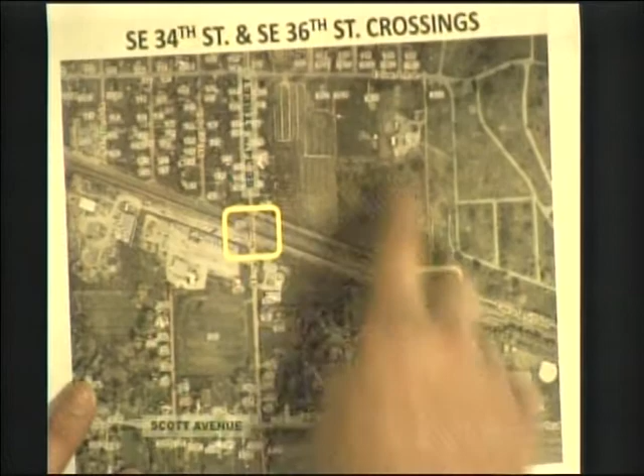Just to get everybody familiar with the locations, we'll have a lot more maps presented to you. This is the Hull Avenue crossing at Delaware Avenue, Hull Avenue to the west, Dixon Street further west, Southeast 34th and 36th Street, Scott Avenue to the south, Dean Avenue a little to the north, not showing up on this map. The other area I don't anticipate we'll spend as much time on is Scott Avenue over by Southeast 22nd Street.

In 2012, Union Pacific came forward with the idea of these 4 crossings being closed. I won't go into detail, I'll let them explain the purposes behind that. But given the magnitude of something along those lines, we encouraged them to go through a process of having some pre-neighborhood meetings.

Normally we have people submit their application to us already for a vacation or a rezoning, and then we direct them between that submittal and the meeting to have their neighborhood meeting. But given the complexity of this, we suggested they take some time before they even submit an application to hold some neighborhood meetings that we would help them facilitate.

We had 2 meetings in July in the Southeast 34th area—one for the Southeast 34th, 36th area, and a second one in the Hull Avenue area. We had some follow-up, took the input from those meetings, and that'll be discussed further so I won't repeat it. Then we went back, evaluated things, and had a follow-up meeting at the Botanical Center in November. We also had a small group meeting with some business owners in the Hull Avenue area to discuss specifically their concerns with movement.

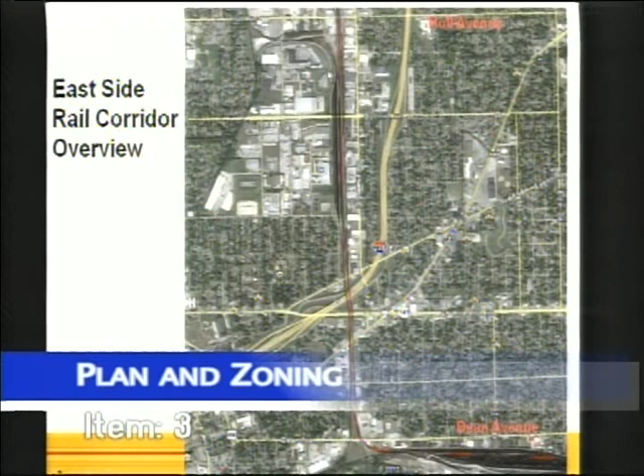To start off with some background, this is the East Side Rail Corridor. This is the north-south corridor for Union Pacific here. Hull Avenue, Dean Avenue, ADM is right up here. As you come down here, we make a sharp 90-degree turn into our east-west yard. This is our short line yard. We'll be talking a lot about that.

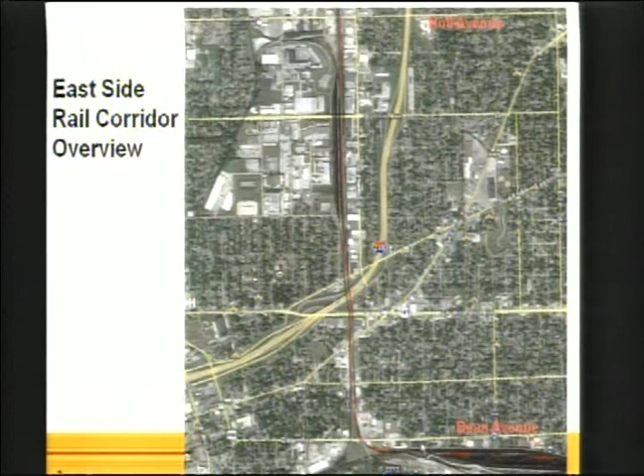This track here, that's not highlighted, is the Iowa Interstate track. That is their route into Des Moines and on into Omaha. Union Pacific and Iowa Interstate share this route. In this part of the yard, this part of that track, the track is very much at capacity, meaning it's full of freight traffic. We have about 100 customers, local-based, who ship goods into or out of Des Moines on Union Pacific.

About 12 trains a day arrive in Short Line Yard. We have an additional 5 to 10 that pass through Des Moines. That's roughly the equivalent of about 6,000 semi-truckloads of goods that are not traveling on Des Moines roadways. We have 170 employees in Polk County with an annual payroll of about $12 million, and we've invested about $15 million in Des Moines since 2005.

There are 4 primary reasons for the traffic delays on the east side due to rail traffic. That sharp curve I showed you limits the speed trains can travel, to a speed limit of 10 miles an hour. There are local industries on the line that have to be served, requiring stop and go service. Those 2 factors really cannot be changed in any way.

Union Pacific, as part of this plan, will invest $750,000 to install power switches that would be controlled from onboard the locomotive. The other factor is we have limited space between road crossings to allow us to put a train both in the yard and outside the yard while waiting for space so a train can be dispatched into the yard. There is no place for us to put a standard length train where we don't sit on a crossing.

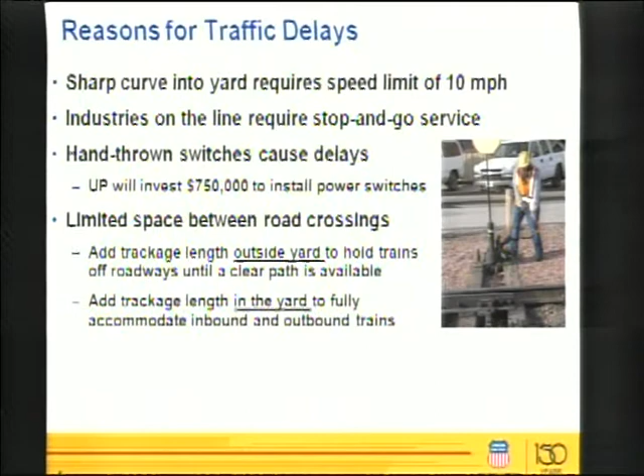There are two things we need in terms of adding capacity: space within the yard and space outside the yard where we can put a train without sitting across a city street. Within the yard, the only place we can gain any capacity is on the east end at Southeast 34th and Southeast 36th. There's no comparable option on the west end because of the curve I showed you and the layout of the receiving tracks for the yard. Without those closures, we don't have space in the yard to bring in a train efficiently. Even if we put those power switches in, we don't have any place to move the train into the yard because we don't have enough space from one end to the other to park a train.

So the proposal, which Jason showed you a little bit, would be to close Southeast 34th and Southeast 36th, and install a new crossing. There actually used to be a crossing here, but we'd reinstall it at what would be Southeast 38th Street. And because of the flooding issues we heard about through the neighborhood meetings, Union Pacific would make available to the city a roadway along our right-of-way for use during flooding emergencies, when they could not have access to Scott Avenue. It would be built according to city standards, which we're working out with city staff.

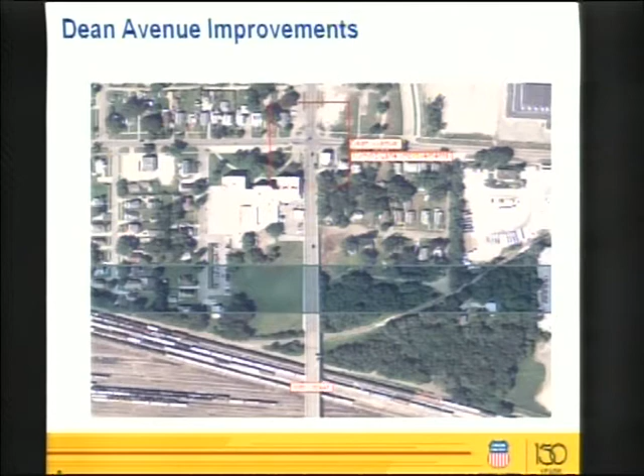I also talked about needing space outside of our yard. We don't have any place where we can hold a train while it's waiting to be dispatched into the yard without blocking a crossing. To the east side, that's Iowa Interstate, and UP doesn't receive trains from that direction. On the south side, we have sufficient space — we can sit south of Maury Avenue or Maury Street and hold a train there until we have space, then move slowly into the yard because we're making a sharp turn. Most of those northbound trains don't actually go into the yard. It's the trains coming in from the north where we have the biggest problem — we don't have enough space to put a train anywhere there without blocking a crossing.

I also mentioned Scott Street. Essentially, until that Scott Street crossing is officially vacated, we're obligated by federal law to continue maintaining the crossing even though it's no longer accessible to traffic. So we're asking for that vacation.

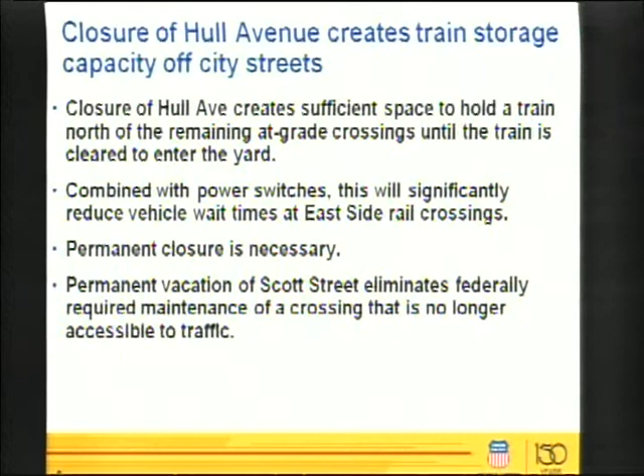So you can see the Hull Avenue improvements — a lot going on here, adding some turning lanes, expanding Dixon, and making intersection improvements so that we can improve the flow of traffic along that route.

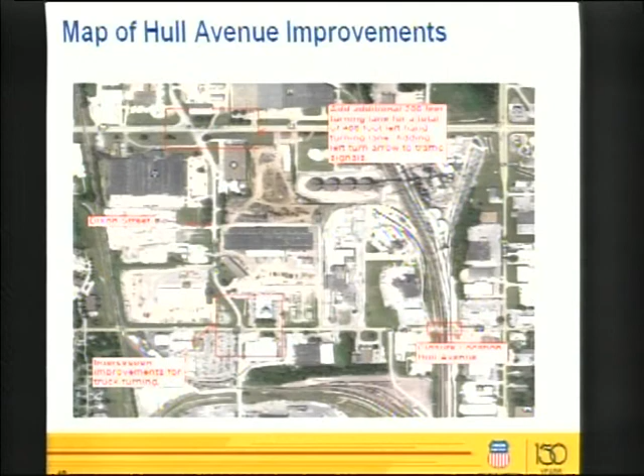We also will do some real-time emergency notification for first responders so they know if there's a train blocking south on Easton or any of those other roads.

The city did some traffic counts here, and as mentioned before, about 3,400 road vehicles on a daily basis would need to find an alternate route, and somewhat over 19,000 on a daily basis would benefit in terms of having that east side traffic move more quickly because of the improvements we're talking about making to the roadways so trains can move more efficiently.

So these closures, this proposal we put forward is Union Pacific's response to the city's request to reduce traffic delays on the east side. Clearly it's also going to improve our operations. It's not good business for us when trains aren't moving, but if we don't have sufficient rail capacity, we're forced to cause delays on public roadways.

Because this proposal will bring improvement for both UP and for East Side residents, we're prepared to invest more than $2 million in the project. It also allows us to meet the needs of our current customers. We're right now being creative in how we meet those needs.

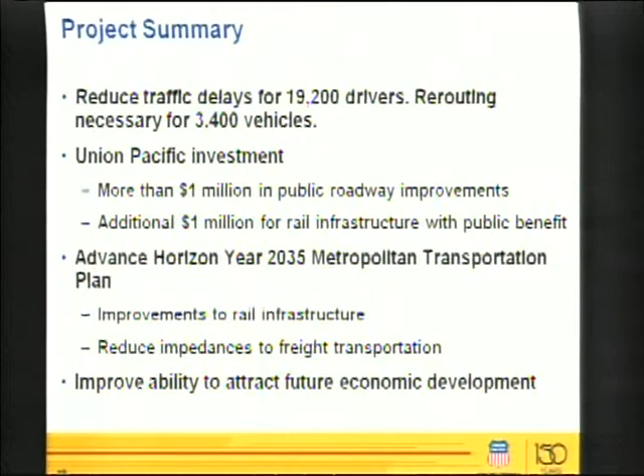But unfortunately, those operating limitations are causing frustrations for East Side residents as they get stuck behind trains, and for our employees as well. As Des Moines looks to compete for future economic development, it's going to need good rail service. You have a letter from the Department of Transportation, and a letter from the Des Moines Area Metropolitan Planning Organization explaining what Des Moines' needs are for rail service. They've done an extensive study about what kind of rail service is needed. This is the kind of improvement that will help them meet that plan.

The bottom line as we see it: without these improvements, we cannot do what the city's asked us to do, which is to improve the flow of traffic on the east side. And we cannot meet the continued needs of our current customers, and certainly cannot meet any new capacity needs that might come into the city.

It's been several years in the making for this proposal. We worked closely with city staff, and we really appreciate their help. We appreciate all the effort they went to in order to get us the neighborhood input we needed. We've made a lot of changes to the proposal as a result of those neighborhood meetings. We're requesting that the commission accept the staff recommendation for the vacation of these roadways. With that, I'm happy to take any questions.

Any questions? Thank you, I think I have a question. Go ahead, Will. Could you go back to one of your maps, please? The one you know... Well, yeah, this one will do.

I'm looking at the figure 19,000 on East Euclid. Those are traffic automobile counts, is that correct? That's my understanding — this is a city chart. Well, it is though, isn't it? Is that not true, a traffic count? That's it, Will. But the red lines actually are rail lines.

Correct, and those red lines are being used by the railroad, and then there are other lines that are not red but are also being used by the railroad. You talked about the interstate line, I think. My question is this: I notice a number of the rail lines north of Euclid Avenue. I have a concern about capacity and the need in the future for the railroad to actually block East Euclid Avenue as well. I believe Euclid is separated. Yeah, there's an underpass at Euclid. There's also, though, a line to the west of that as well.

Did we cross? No, that's ADM. This dead end is a dead end, correct? Yeah.

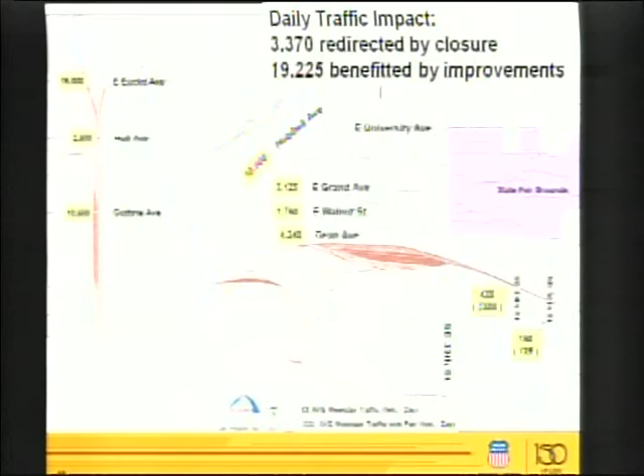Right here, this line — Union Pacific Railroad, Omaha — right there, that line's the Ankeny industrial lead that goes out towards Ankeny, and it is presently being abandoned, or is abandoned, from north of 54th Avenue. Is it possible that could be used in the future and reopened? It all depends on how the rail banking or what happens to the right-of-way at that location in the city of Ankeny.

We also have the Swanwood industrial lead that goes north up there as well, and that is available for industrial development up there at this time also.

I have another question. The staff report mentioned that the fire department has determined that there might be a need to use Dixon Avenue at a time when it's blocked, and as a result, there'd be a flashing light that would warn emergency vehicles to use a different route. Is that concern warranted? I would defer to the fire department on that. We will install that as part of the plan, but I would defer to the fire department as far as their concerns about that.

Tom Patava, Fire Marshal with the Des Moines Fire Department. When we were asked to take a look at this plan, the one concern that we had was, since we would not be able to use Delaware if we were coming from station number 3 to get to the northeast, say at Luther Park Apartments, we wanted to be able to use Dixon. But knowing that there was a train crossing at Dixon, we didn't want to turn north on Dixon and get to that crossing and find out that there was a train. So we asked for some type of a signal, some indicator at Guthrie, so that we knew that there was a train across Dixon. We would continue east on Guthrie to East 14th and then come in from that direction. They've indicated that they can do that for us, and with that, we do not have any concerns about responding to that area with that closure at all.

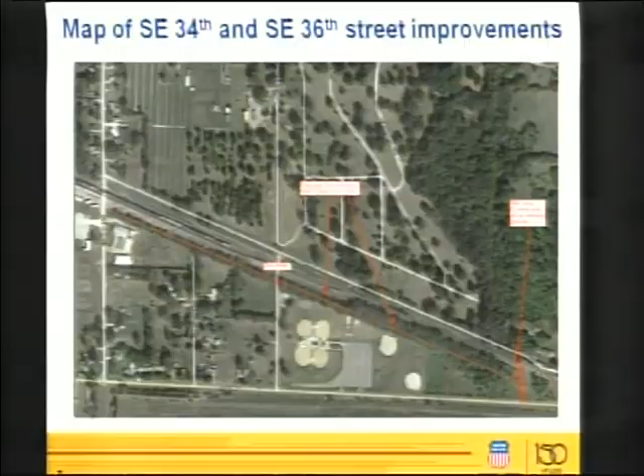Yeah, they would. If this project moves forward and the city council ultimately says yes, this is something we want to do, we will be developing an agreement with the railroad, and that legal agreement would include the list of these improvements that would be made. They would actually pay for them, and the city would be constructing them. So long story short, yes, they would pay for its construction, but Public Works would, after it had been used, need to go through it, make sure it had ample rock on it still and graded. It wouldn't be an ongoing thing because it's closed, just as needed.

Does that answer your question?

Well, I don't agree that I'm jumping around, because that was conflicting information that I heard. My concern is we have other neighborhoods that don't have paved streets and we're not maintaining them. And if we say we're going to maintain some more, I'm concerned that we're stretching our limits with our budget, which has such big constraints on it. That's just my concern.

Yeah, I apologize, I wasn't trying to suggest that the question was out of line. I just didn't know if the chair would prefer I go through the staff recommendation that includes all these improvements. Yeah, I think that's what we're looking for. Okay.

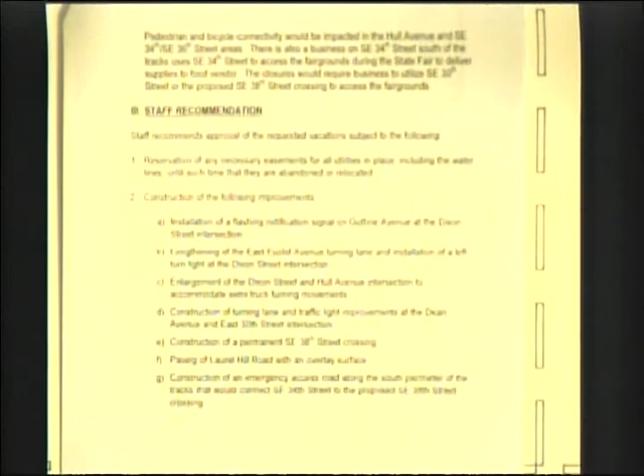We, as staff, have looked through this. There are things that need to be mitigated. We've developed this list that's a part of our recommendation. We only are comfortable recommending approval if these improvements are made. So I'll read through them and show you where they are impacted on this map. One is the flashing notification that was already discussed, so that would need to be part of the construction.

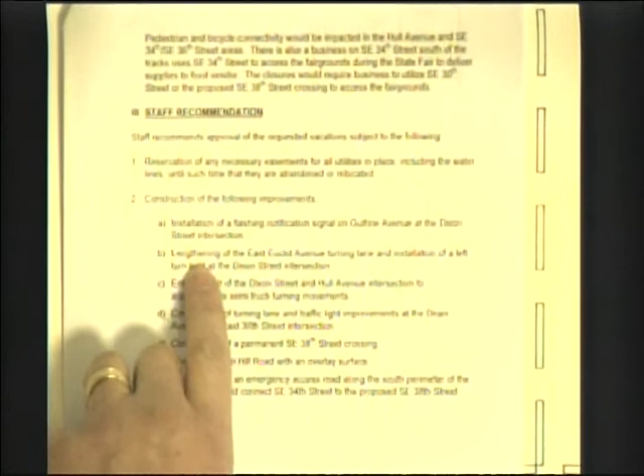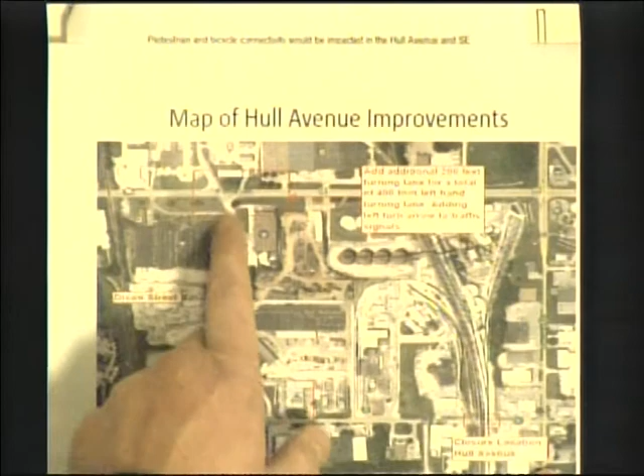B is lengthening the East Euclid Avenue turning lane and installing a left turn arrow at Dixon and Euclid. I don't know how well this shows up, but right now this is a 200-foot long turning lane, so it would be increased to 400 feet, and an actual arrow would be added. Right now there's no turn arrow; it will help facilitate movement. So that's one of the improvements.

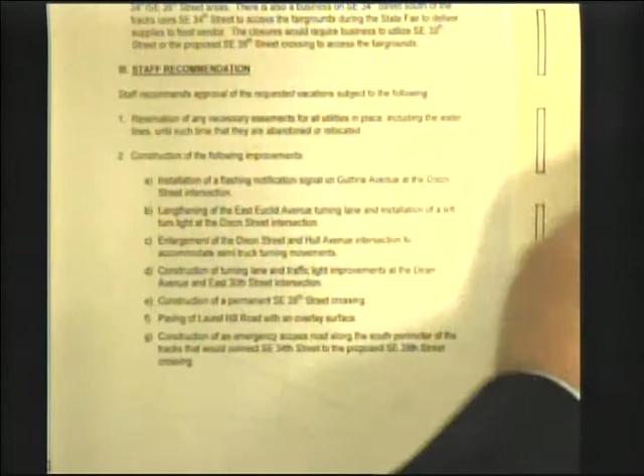D is construction of a turning lane and traffic light improvements at Dean and 30th. That's been mentioned, so I'll show you a graphic that shows how that would work. Here's Dean Avenue and East 30th. You can see the addition of two lanes to the north and the turning lanes on the four sides.

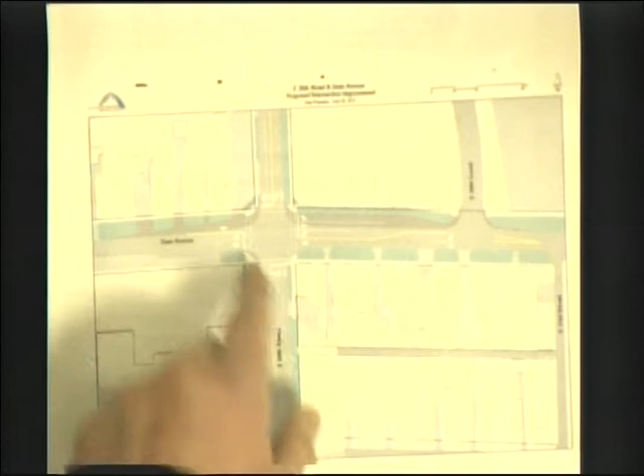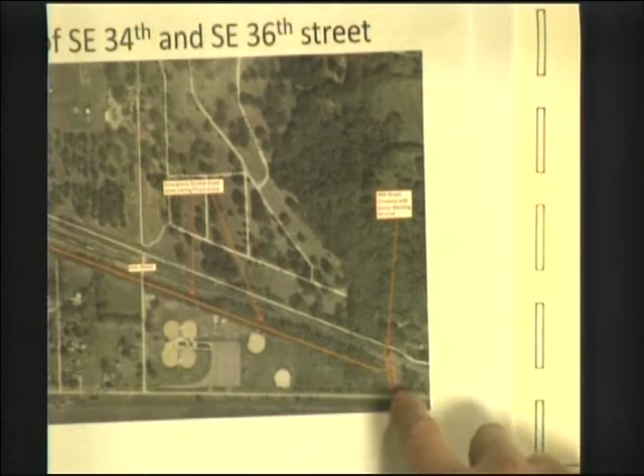E is the construction of a permanent 38th Street crossing, which we've mentioned. It would connect Laurel Hill Road and Scott Avenue and be open at all times. And then G is the emergency access road connection.

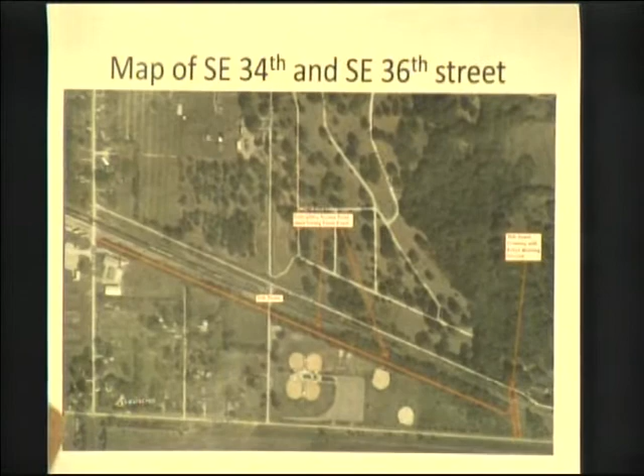As I indicated, if this project were to move forward, the City Council will receive whatever your recommendation ends up being, and they'll have a decision before them to make. That will be either to decide we're not proceeding, that they're not interested in the project, or to direct staff to continue working with the applicant to iron out all the contractual requirements that would ensure all this would take place.

Jason, you also, I think, left off F, which is paving Laurel Hill Road with an overlay surface. Okay, yes, I apologize if I didn't mention it. No, that's fine, I just wanted to note it.

We were continuing to look at comments as they come in. I anticipate that we'll have a lot of comments tonight and perhaps new concerns that may be brought forward, and we're willing to continue to look at those as well. I'd be happy to answer any questions you might have.

Have any questions? Mike? Jason, can you go back to the graphic? I think it was Dixon, where you showed a line with impact on the surrounding properties at the intersection. The turning radius? Yeah.

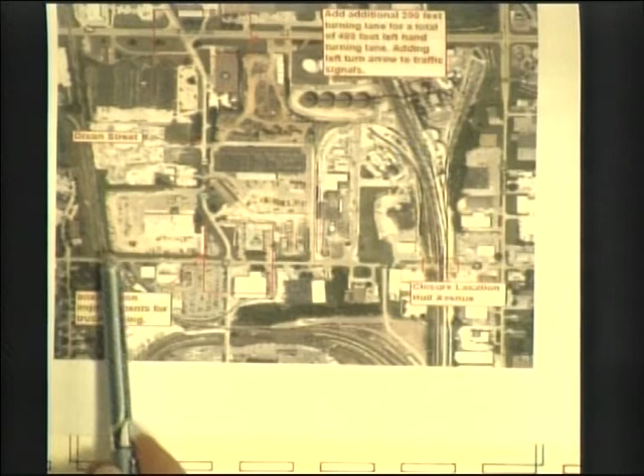So, Jason, could you point out on that area where the crossings are that might be affected? I believe the crossing on Dixon that has been raised as a concern by the fire department is down here. I think perhaps the gentleman who spoke was also talking about the crossing on, I don't know if he mentioned Hull—there's a crossing here on Hull. I don't know if he was talking about how there are multiple points within the neighborhood, but this is the one identified by the fire department as a concern.

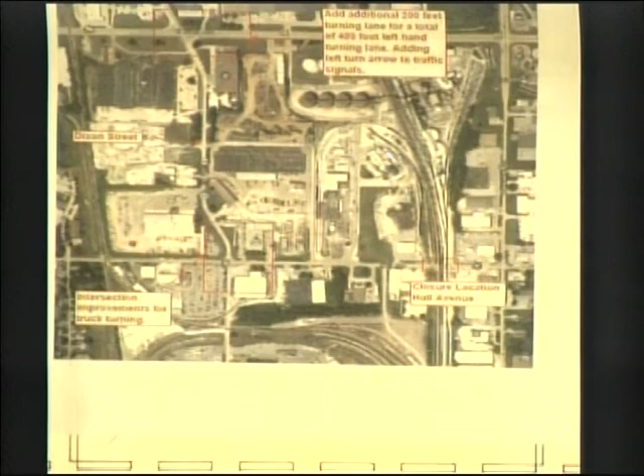Okay, could you put it in focus, Jason? It's kind of fuzzy. Let me see if I have a better photo. Part of the problem is the picture quality, not just our document camera. And Jason, actually, I haven't.

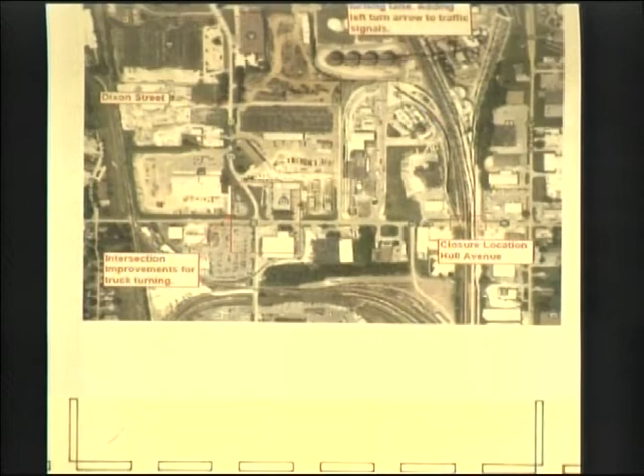So here's Dixon, Hull, the crossing. Okay.

There was also a question from one of the commissioners about right-of-way acquisition, and that hasn't been finally determined at this point. It would be subject to further analysis and negotiation with individual property owners.

I also had a note about a concern regarding the soils around the railroad right-of-way between East 30th and East 38th and the roadway sub-base. I assume that would be looked at as part of the roadway construction design. It would have to meet our city standards for a roadway, including the sub-base, and if it was insufficient, they'd have to amend that soil where the road would be to provide adequate sub-base.

Is that accurate? Yeah. I just want to emphasize that through this process, we've been working with the design section of our engineering department, and they've been providing feedback about feasibility and placement of that emergency road or construction of the 38th Street crossing. So we've gone to a level of detail beyond just drawing a line on the map and assuming it can be done. We've made sure we worked with engineering to evaluate those proposals.

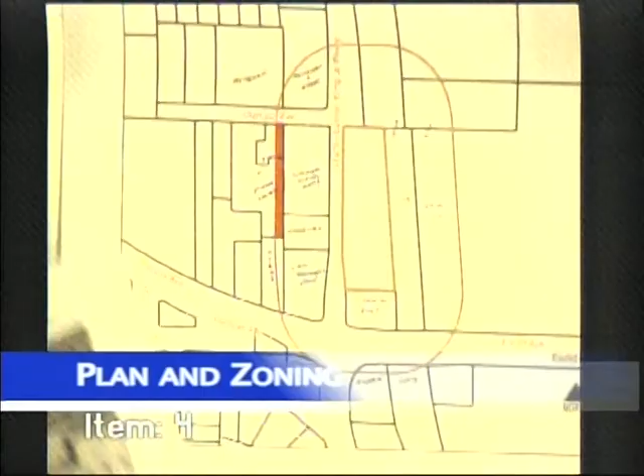All right, we're going to go ahead with item number 4, a request from Kent Lehr to rezone property located at 2425 Euclid Avenue. Jason, are you presenting on this one? Yes, Chair, members of the commission. Jason Van Essen with the city's planning staff. We have one card being passed around, and a letter from the Lower Beaver Neighborhood Association. There's the response map. The property is near the Douglas MLK intersection.

Okay, so you have the letter. Excellent. The site was originally constructed as a lumberyard. The applicant is seeking rezoning to M1 to allow it to be used for a construction business. I'll show you a couple photographs and get into the staff report. So this is the intersection. This is the property in front of it. You can start to see the property back to the north, the southern perimeter of the property, and then looking back down MLK towards the south. There's a mix of buildings, as you can see from the aerial. There's office space, there's indoor storage, and outdoor storage that would be part of the proposal.

When we look at these rezonings, the first thing we do when somebody comes in is compare it to the 2020 community character plan and the designations on the future land use map, and also the goals within the plan and the text component. In doing so, and looking at this proposal, we are recommending denial. We don't feel that it's the appropriate location to amend the land use plan to general industrial, or for light industrial zoning, M1. There is residential development in the area, as you can see on the map. This area is kind of what you typically think of for highway-oriented commercial development, C2. I know we've talked about this type of situation in the past few months with some different proposals. This might be something where a use variance, going down that process after a rezoning, could be a potential option. So anyway, in a nutshell, that's the staff recommendation.

Happy to answer any questions from applicants. Any questions? Okay. Could the applicant please come forward and give us your name and address?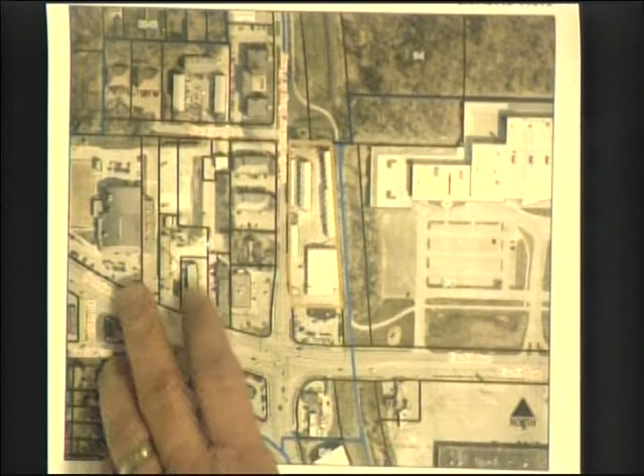To give you an idea of the area, over here is the old Target — huge investment. Polk County just did an awesome building there, River Place. Up here we've got Plaza Lanes and Trophies. Randy Thompson owns a lot of land in the area and a lot of businesses. In fact, we're undergoing the revitalization process in our neighborhood, and he is a key component as a business owner. He was very concerned about M1. I've reassured him about who the individual is.

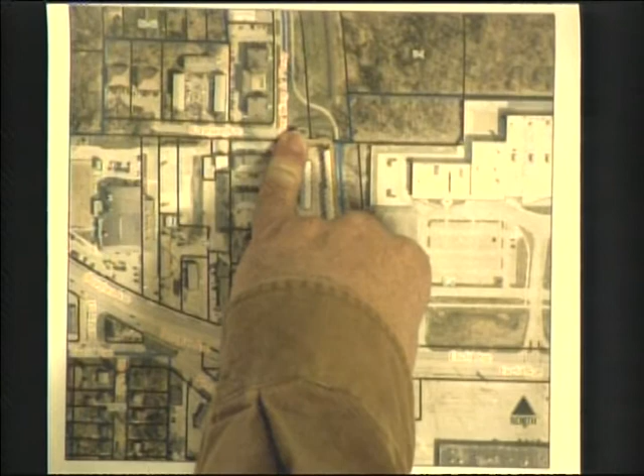This is a trestle trail that runs up there. Alongside it is the MLK greenbelt that the neighborhood developed without city funding or anything. It's the largest greenbelt in the city done that way, and it's almost a half-mile long. And where it ends is at the Thai Village, another awesome development in the area.

The Lower Beaver neighborhood, a couple of years ago, was cited as the second most stable neighborhood in the city.

So why would we consider an M1 use in the area? Well, we like the applicant and we think we can control it. But what it has to do is go through this body and be denied, and it has to go to the city council being denied. It's kind of weird for him to get a variance to do the things he wants. He has to go this route, and he has to go against what's good for the neighborhood in the long run.

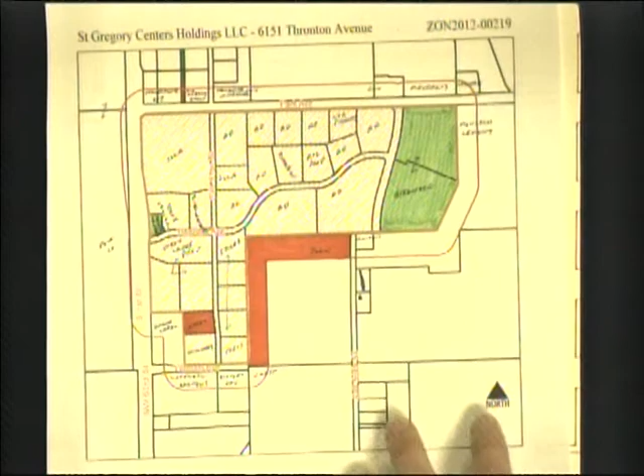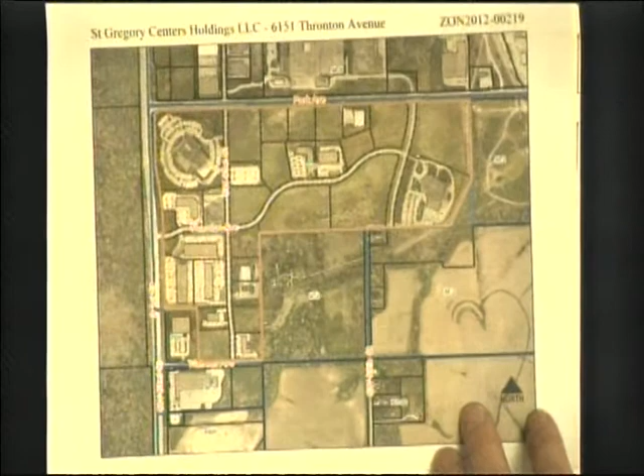Anyway, it's the boundary of the PUD, and then the notice area extends beyond the boundary of the PUD. This is the subject property, 63rd Park Avenue, or the subject, the PUD. Here's a photograph of the specific building within the development.

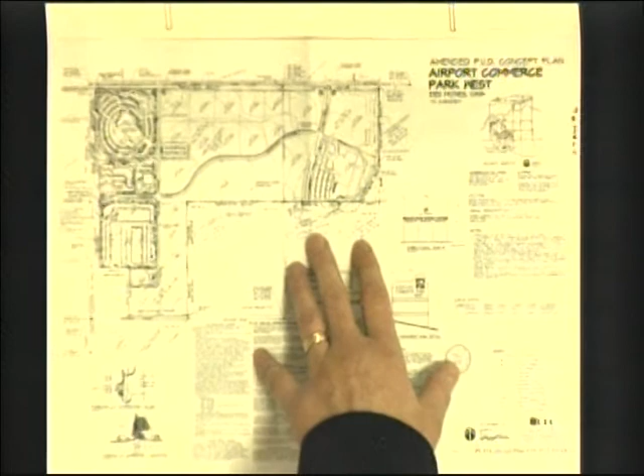And then this is the sheet that we have for the concept plan, the update. This is an existing PUD. This is a specific use. This use is not specifically mentioned within the PUD as it stands now. Therefore, it needs to go through this amendment process, which is really the same process as rezoning, but really the only change that's proposed here is specific to the language of allowed uses.

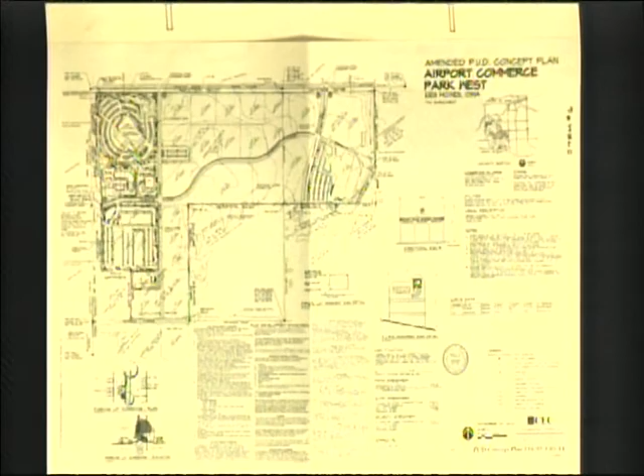We've reviewed the proposal. We think that it's in line with the intent of the PUD and also with the establishment of the designation and land use plan. We are recommending approval. We do have a list of conditions, but I'm not going to read through them because they're really housekeeping type additions with regard to notes on the PUD, such as identifying buildings that have been built since the original concept plan was approved.

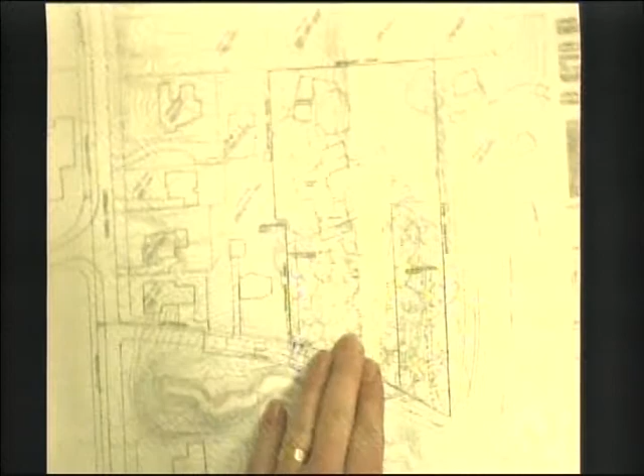So here's the proposed plat. The driveway access back to the existing property. There would be a shared easement to provide access to this property so they wouldn't have to try to negotiate the grades that are a little more challenging here.

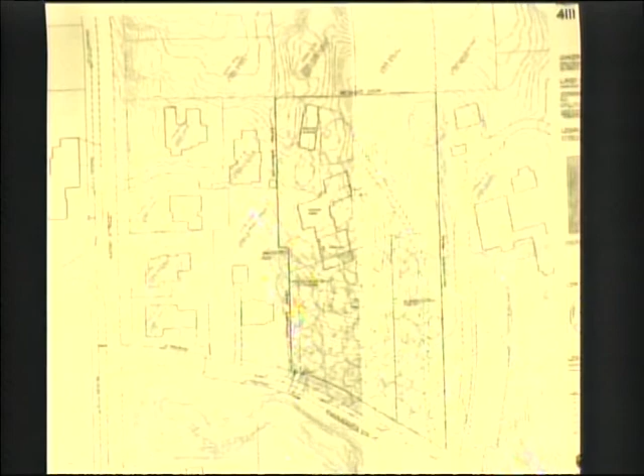The one thing to point out here is that these lots meet zoning and stuff. The reason this is before you is essentially to extend a water main to this lot, which is within the vicinity, but it's not. It will have to happen. It does require a preliminary plat that comes before you. If that line had been in place, this would have been done through our plat of survey process administratively.

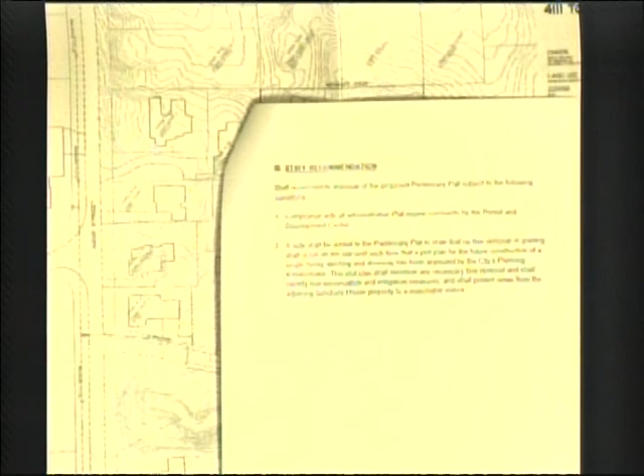In reviewing this, really we only had one note that we wanted to have added to the plat. It's a wooded lot, and it is subject to our tree mitigation ordinance. In addition, we have a note that we are recommending be added to the plat that basically states that no tree removal or grading shall occur on the site until such time that a plot plan for the future construction of a single-family dwelling and driveway has been approved by the planning administrator. The plot plan shall minimize any necessary tree removal, shall identify tree preservation and mitigation measures, and shall protect views from the adjoining Salisbury House property to a reasonable extent.

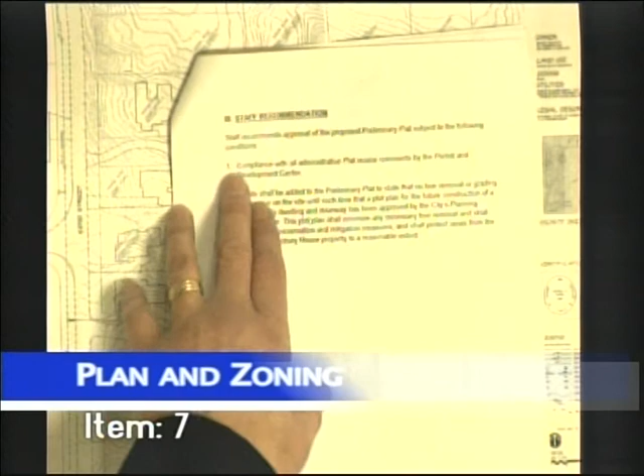So that, along with our typical compliance with administrative review type comments from the engineering part of the Permit and Development Center, are our two conditions. Any questions?

CJ? Has the neighborhood weighed in on this or anything? I think this is a huge project for being this close to Salisbury House and a large amount of land, and I don't see anybody here, unless you guys are... oh, you're the applicant, okay. So I just wondered if the neighborhood had been notified.

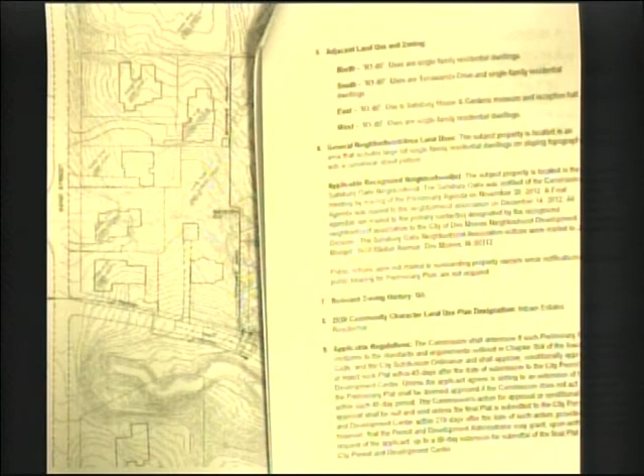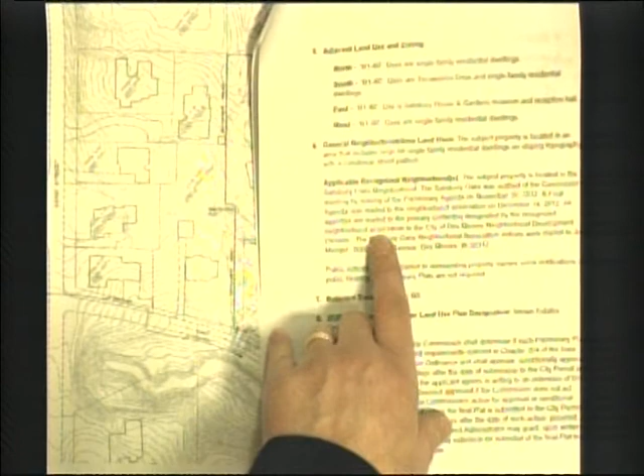In the staff report, the property is located in the Salisbury Oaks neighborhood, and they were notified of the commission meeting by mailing the preliminary agenda on November 30th. The final agenda was mailed to them on December 14th, sent to Jed Mingle, who must be the neighborhood representative. We did not do individual notices, though. It's not required on a plat.

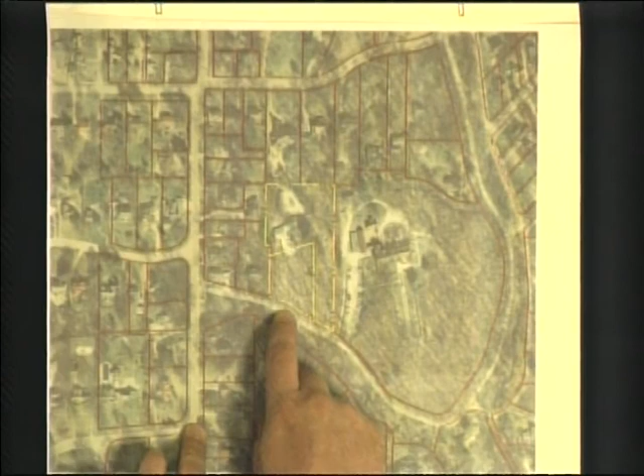Shane, just wondering where the water main's coming from. Okay, let's see. The yellow is the outline, the original lot. This is our proposed lot that Tom would like to build on. There are no water mains along this road at all, which is a very unusual situation. In order to put another house here, we need to bring the water main down and put a hydrant in here, with services up into these lots.

This has nothing really to do with the request at all, but I'm interested: was this land originally part of the parcel at Salisbury House and subsequently sold off, or is this a parcel that emerged on its own? I do not know that it was part of the Salisbury House. It has an existing residence on it that's been there, I believe, since the 50s.

Yeah, I can address that, since I chair the Salisbury House Foundation Board. This was part of the original estate, and this home that's going to remain, most of it, was built by a son of Carl and Edith Weeks named Hud Weeks. It's two Lustron homes that were tied together, and it's still pretty much intact. So yeah, it was originally part of the estate, but I think it was parceled off a long time ago.

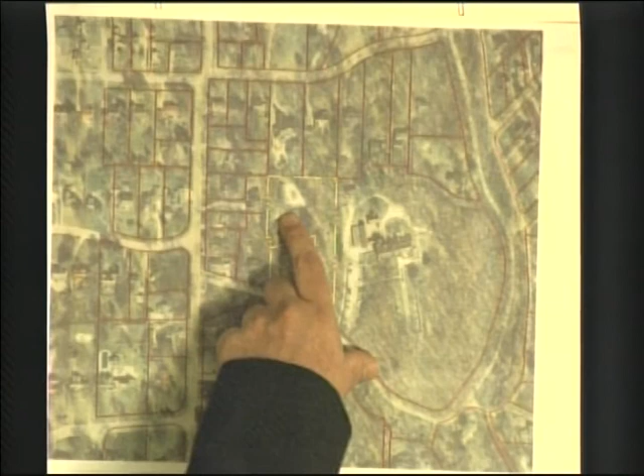And the Lustrons are to remain on this lot. The purchaser of that lot would determine what they want to do with them. They're in a state of disrepair, but they could fix them up if they so chose. Any other questions?

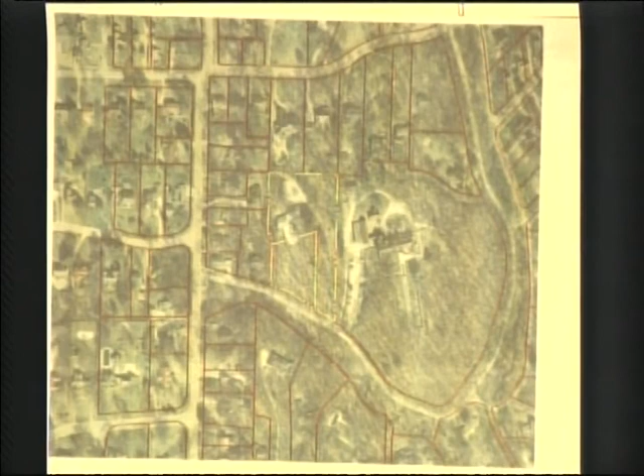Thank you. I'm going to go ahead and open the public hearing. Is there anyone here to speak in favor of the application? Please come forward in favor of the application. Seeing none, since there are only two people in the room. Is there anyone here in opposition to the application? Likewise, seeing none, I'm going to close the public hearing.

Greg moved staff's recommendation. Any questions, discussion? Seeing none, all those in favor please signify by raising your right hand. Opposed, same sign. CJ, are you not voting? I didn't get to vote there. I'm for it. Opposed, CJ, are you in opposition? Let's do that again. All those in favor, please signify by raising your right hand. Opposed, same sign, and one abstention. So it's acclamation with one abstention.